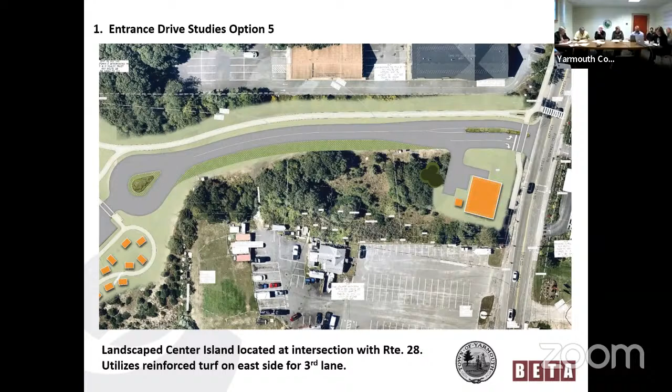So that gives them flexibility without an excessive amount of pavement. We really just kind of open it up at the entrance with the island and the left and right turn lanes. And so then what we did is we shared this with CDM Smith, and those folks are the ones that are working on the pump station itself. So this was their concept sketch they came back with. They're kind of zoomed in right at the intersection of 28. And I don't know, Kathy, you want to give them a little overview of what CDM was tasked with?

Was saying, okay, we want to have our entrance this way with a 6-foot island in the center - are you going to be able to fit in your pump station in the area that you have left, including having the setbacks from the isolated wetland of 35-foot no disturbance, and a 50-foot. You can see in the green there's a 35-foot and the 50-foot, so they didn't quite meet all of that.

But what they're showing here is a lot of grade change. They not only need to get above the base flood elevation, but because they're a critical facility, they need to be 3 feet above. So they need to be at a first floor elevation, I believe, of 14, when somewhere around in that area might be 8 in this particular location. So that's why you're seeing a lot of grading going on here.

They also have a lot of stormwater management that's being proposed here. What we have for most of our stormwater management is actually the porous pavement, so we don't need to have a lot of structured or surface stormwater. So that's something that we need to take a look at, because we really want the entrance to look a lot nicer than having a stormwater basin and a lot of grading in the front.

So there's a lot of work that still needs to be done here. They have a retaining wall - obviously we can soften some of that with some vegetation, but they also have their generator on top of that.

So we want to start taking a look at maybe if we can move some of these things around, maybe move it a little bit closer to Route 28. We really want this to be a much nicer entrance to our park and not just something where somebody drives by or rides by on the bike path going, what is that thing over there? So we got a lot of work to do, but this was just giving them a general idea.

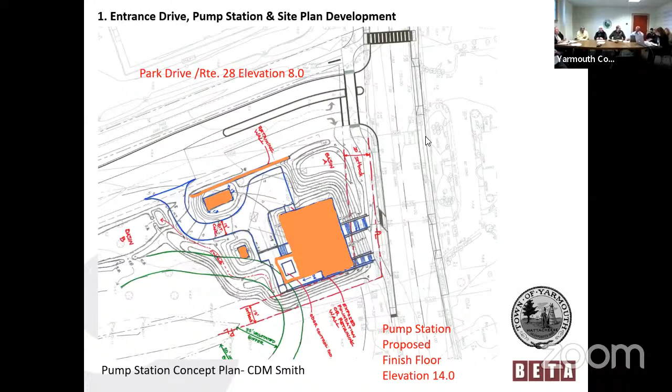A center aisle between the restrooms then, which is where the plumbing all comes in and is connected, because this is not going to be a four-season facility, so they need to be able to drain everything down at the end of the season. And then right now we're still carrying the office space, kind of a flex space in the front on the southern end of the building. So it could be, someone said, maybe some storage in there possibly, and certainly a flexible use in that space, and that's about 10 feet wide.

So the southern end being the end that would be facing Seagull Beach. Correct, the event space facing into the People's Park. We can go into some of the plan views of that as well. And we had mentioned early on about this office space possibly being shared by any of the groups or performers that might be performing.

That's still not defined. I think that was when we had the discussion about having the restroom facilities closer to the potential staging area. But now it's more like the idea of being able to use it for ticketing and for administrative purposes for the event space. It's really a flex space. It sounded like there was a lot of different things that this space might be able to be used for.

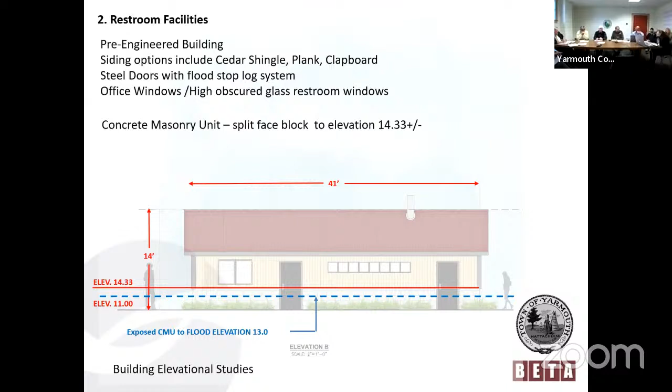This one, we show it as if the block is visible on the bottom. The example we were looking at is like the DPW facility, which has the architectural block on the bottom. You have that option to highlight the bottom if you wanted to and have that kind of block visible - it does make the building a little longer and narrower. Then the top option, we just showed the siding coming all the way down to the ground. Behind that would be the concrete or block to protect from flooding.

So if I can quickly ask, are you suggesting this is the style of what you want? We're moving in that direction. We can talk about that in a little more detail in terms of finishes and materials. Is that what you're asking when you say style?

The look of the building? Yeah, so generally this is like a barracks. I don't like the look of it at all. I'm being very honest - I think it's ugly. We haven't developed a lot of the architectural treatments, so we can work through that with you and refine it somewhat.

So what you're seeing is kind of a function of the floor plan decision - the way the spaces lay out inside, and we translate that into a footprint, then build up the elevation views. So I guess one of the first questions would be, do you like the idea of the exposed block on the bottom or the siding going all the way down?

I like the second one on the right at the top - the siding coming all the way down. Yep, agree. I don't think it makes a difference one way or the other unless this is what we're going to commit to as the style of this building. Well, I think we're going to change the style of the building or the look of the building.

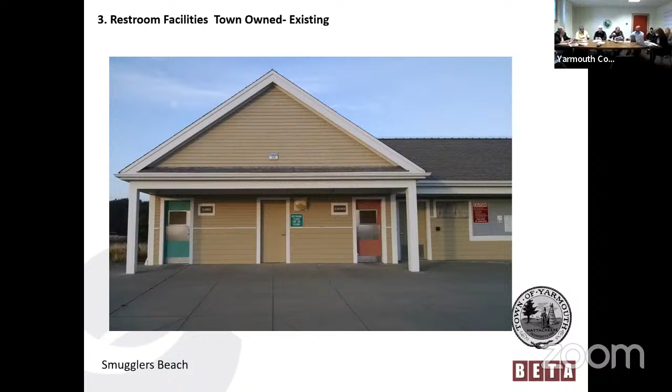And so, thinking about the finishes, I think we talked about not seeing the block and running the siding down. Smugglers is a wide horizontal style. Hardie plank is something you would use. Is that a look you like, or would you prefer a Packet shingle, which is a little more traditional, truly shingle?

Wood shingle. Well, I'll tell you the Hardie board is going to give you a much longer life expectancy. This is a clapboard look, but you can get Hardie plank and even shingles too. So it's a preference of whether you're interested in clapboard or shingles. We can get the material. I think you've got to see the design of the building to decide.

There was a reason Packet is wood shingle, right? It's a very traditional approach, because it's in the historic district, but I don't know if that's necessary here. So here I think we could use a Hardie plank type of material, same look as DPW. DPW preferred an asphalt shingle roof over a metal roof. Fifty years, we'll be dead and gone before they redo it.

Do we want to get back to the solar question? Because I think that matters. You wanted me to find a plan, do you have it? So what would this solar provide? What utilities are we having in there, just lights? We're going to have power to the building already. Fans.

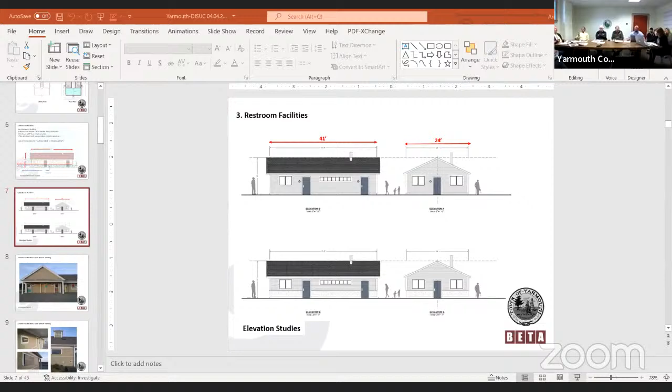Well, it's way back. And it would be on the southern side, which means it wouldn't be seen from 28, it would be seen by the boardwalk. So positionally there's no trees to get in the way. It would probably generate decent power.

Stand in the picture. Yeah, everybody turn around. Well, it's only Carl, I guess. It's just you, Carl, and the public. So I'll put this, sorry.

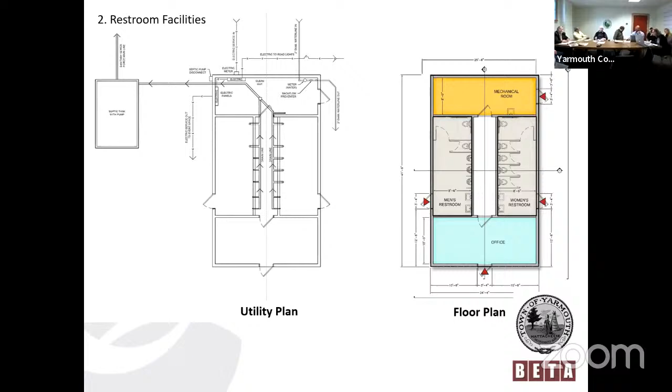Susan, do you have any opinion? In a big event, though, having the two on one wall gets congested a little. Okay, maybe for a large event it might be better to bring them up and then separate them. I like the idea of the common walkway, getting them up onto the platform and around the building. Right. Men to the right, women to the left. It's like traffic calming. Non-binary. Yeah, right. To not bring it all to the same spot with a big crowd. Okay, that makes sense. But we won't go there.

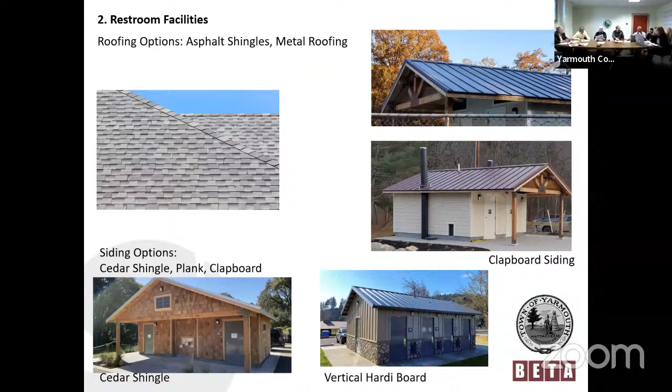So we're almost talking about the Packet Landing model as what we're looking for. So we're basically talking about a post and beam structure, with a concrete CMU or poured-in-place knee wall set inside, enough to have a walk around the building, and with some kind of shingle, a cement, CertainTeed type, on the treatment. I thought you were talking about having a wrap detail on something that comes out and has the overhang at the entrance into the bathroom. So basically an overhang around the structure with post and beams with lighting, and it seemed like there was interest in the cupola concept.

Yes. Take the existing building that you have that's very nondescript and set it right inside that, and see where we can go thematically. It's going to be a $1 million building. Well, it doesn't have to be post and beam and all that. We get stimulus money. Kathy makes a good point. I think the budgeting for this was pretty modest originally. But until you commit to something on paper and say, yes, this is what we want, then we can go through the process of estimating. It'll be somewhere in between. It will be more embellished than this, but not quite as fancy as Packet Landing. Break the bank. Packet Landing was what, $400,000, and it has two restrooms and a deck.

Yeah, I think what we're all saying is, nothing more than this, as long as you understand it's not going to be available. Not as expensive, right. Get us close. Sorry, I didn't mean to turn your back. Okay, I think you got the general idea about that. All right, Eric, what else you got?

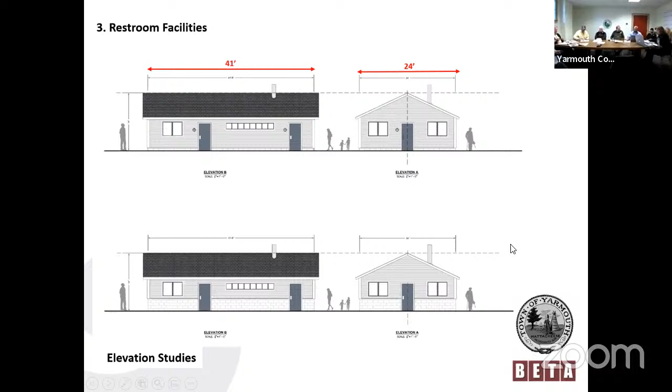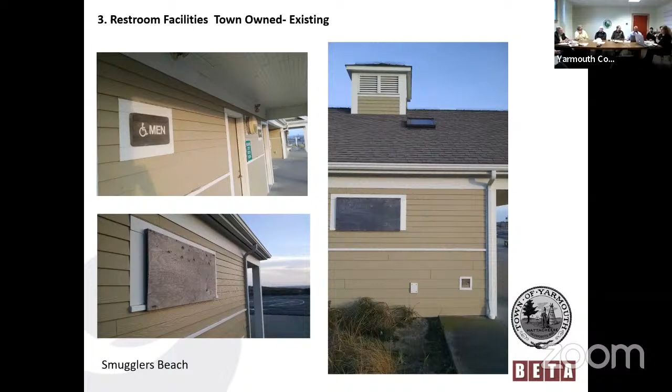We'll keep working. We went through some of the finishes on the outside and we'll come back to you with that. I think you said shingle would be okay or clapboard, either. Think like Cape Cod, shingles, if you get it with sand dunes. Cement shingle.

Cupola, did you talk cupola? Yes, kinda cool. If it was illuminated, that'd be great. Illuminated, that's been waiting to get put up for a couple months. I can probably get it.

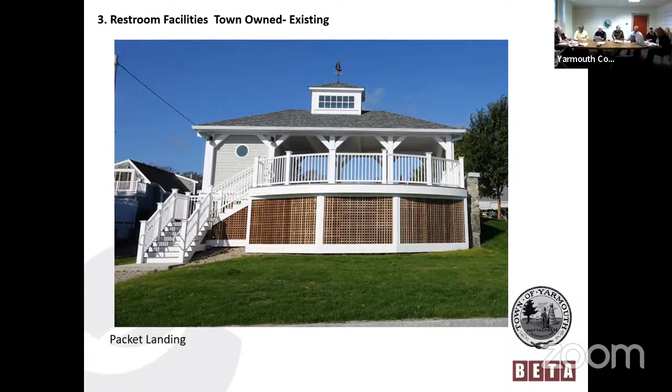But the thing is, you could do prefab beam, can it be small, a shop can make it, and plus you can use panelized construction. There are some efficiencies we can develop along. It doesn't have to be stick built on site. Just put it on at the end.

No, got some ideas on that. All right, thanks, Dad. I'll need to go to Hawaii and investigate cupolas in Hawaii. Well, next destination, actually, why trip.

Why don't we get the Votech school out here to build it for us? Maybe there's pieces that they could help with. Hey Jim, how about we get the Votech school to come out here and build it? They do projects like this. It's a great public project.

You match some funding to that, we fund all the materials and everything, but they build it, so you get free labor. I mean, it's not free labor, they're not free. Well, it takes longer, but you can't do that, it's like illegal because they...

Well, it is prevailing wage, it is a town project as well, state wage rates, and so there's a process. One of my notes to myself with regards to naming, having a discussion we'll get to, is public-private partnerships on some of this stuff.

Yeah, that's a good idea. An initiative like that on this building, maybe you could build some really great partnerships to get the building to happen. Sort of like the Yarmouth Police Foundation, and the same thing they did with the LaRusso building at Flax Pond. So we have some stuff. Anyway, I don't want to get into that.

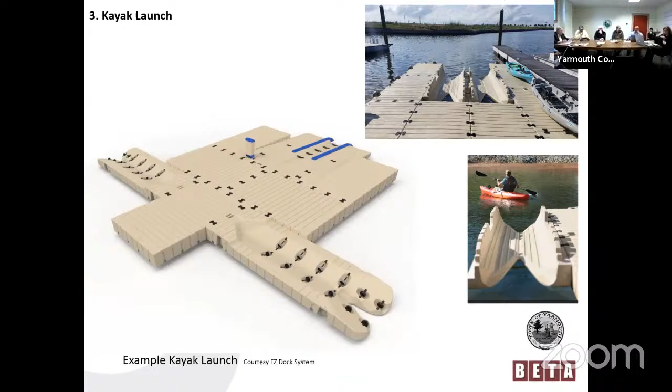We've been looking at some other options that have almost wings or fingers that stick out, allowing a slip where the paddleboard or kayak can fit into that. We reviewed that in more detail with Carl this week, and the feeling was something more flexible like this, with provisions in specific areas for launching, but also the flexibility of a more open space in the middle, would work better for different types of canoes, kayaks, and paddleboards to use it.

I think the consideration we're looking at is, if we had a scenario like this, providing grab rails so it would help you get down into the water, or likewise be able to pull yourself up. We're looking at universal access in terms of disabled folks, how they might be able to use the facility. Maybe there's a transfer platform or a little bench mounted to the float so you can go from whatever your position is to sitting on the bench, then into the kayak itself.

These examples, I think, are what we feel would work best, based on the work out there. As for the sounding work, I can show you this. So we went out—the weather and availability combined—we had a hard time doing this in February, but we got to it in March. We were able to go through the soundings.

You can see it's kind of a bowl shape. There's not a real clear channel through this area—it's quite open—but there is this targeted zone where the water is a little bit deeper. That's where we're headed to try to put the floats in the water.

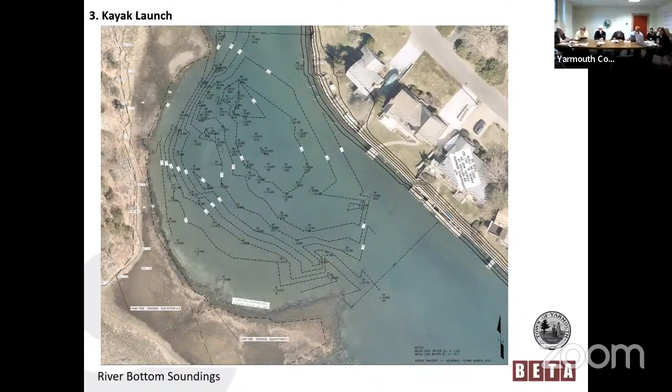Is the idea behind having floats there, as opposed to just natural ground, to keep people from disturbing the area by walking in it? Yeah, it's salt marsh. Unfortunately, you'd have to cross the salt marsh today, and dragging—you can see in this view—that emergent grass, it's probably been done historically, but if you really bring people to this park and focus activity there, I don't think that's going to work for the vegetation to survive long term. So the goal is to get them over and then onto this.

So onto this, you'd have a float like the next panel? With the ramp area itself, you'd have a ramp to go down onto that, correct, like a swim-on type of thing.

We're working on design concepts that don't rely on pilings. We're working on anchors that could be in the floor of the river with a flex mooring line, so the idea is you wouldn't have as much visual stuff—components around it—and the mooring lines would be set up to allow the floats to go up and down with tides and so on. So it's that kind of look, but it would have the wedge-shaped platform at the bottom.

Would it be a piling or something for the ramp? Yes. Because I'm just trying to think—so it's easy for Carl to put it in and take it out, it's not a major undertaking. Right, we've been talking with them about how to do that best.

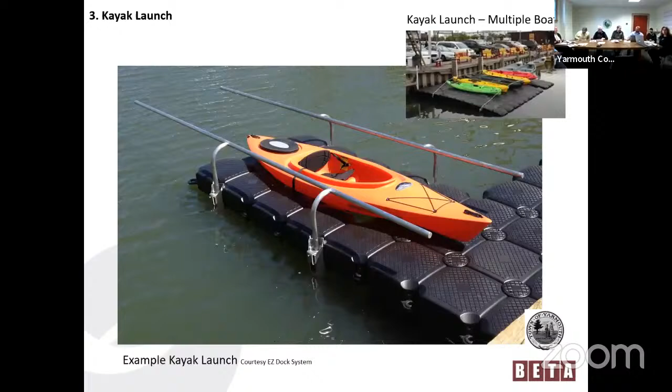The channel mark—operationally, are we thinking of a concessionaire to do the kayak rentals and things? Possibly. We're trying to have like a little kiosk, so to speak, where someone could rent out different kayaks. Obviously we'd have to go through a whole process for that, but we would also have the racks there.

You see it around a lot of different recreational areas where they rent out racks for vessels, kayaks, that'd be helpful to people—maybe an extra shanty building for the kayak rentals, like the ones that take place just across the river in Dennis, at the Veterans Park or whatever. It's a possibility, obviously it depends on how interested someone would be in having it, and how frequent, and how much money they could make.

You put out the bid, but we'd also say the public could just ride up with their own kayak and ride right under—bring your own kayak, yeah, I think that's what they do over at the Bass River Bridge. If you pull up with your own kayak, you can rent, and they have theirs to rent as well.

So it's the equivalent of a town landing as well as a rental. Actually, Carl will know—would we want a rack, and is there, do we do that now? We have a rack and you pay a fee for that, right? Yeah, if you go to Bass Hole, before you get to the park, just as you get to the parking lot, there's a dirt area—there's a rack on the right-hand side.

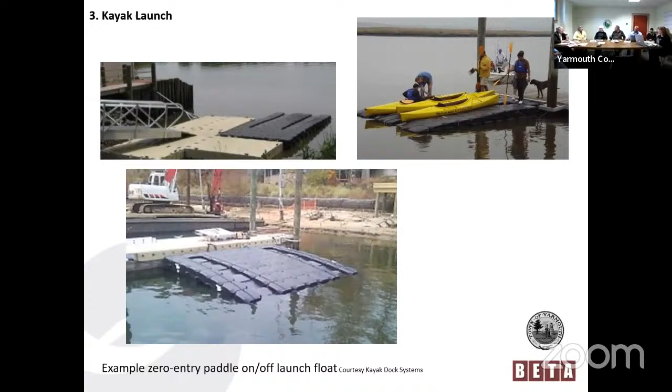People pay a fee to keep their kayaks there, just like at a lot of mooring places, or Dennis Pond, a boat slip—not as much, but they do charge a fee. Kind of like a bike rack for your kayak. Yeah, it is. There's not a 10-year waiting period, is there? It's only... that's a tremendous, okay I like that.

So Carl has something to add. Well, since you guys were picking on me most of the meeting, I finally worked up enough anger to speak.

There's a tremendous, absolute need and desire for rack storage, especially for paddle-style boats. We sell out all of our racks pretty much in an 8-hour period. This year, I think we sold out Bass Hole in the first 3 hours, and that was simply people waiting in line to rent those racks. So they're very popular. A facility with close proximity parking and a relatively calm area to kayak in, I think there'd be quite a demand.

Carl, this is Jim. Couple quick questions for you. Looking at this chart with the soundings, can you give us a general idea of where the actual channel for boating is? Is it right where that arrow is now, or are we in the channel right there? How far out does it go?

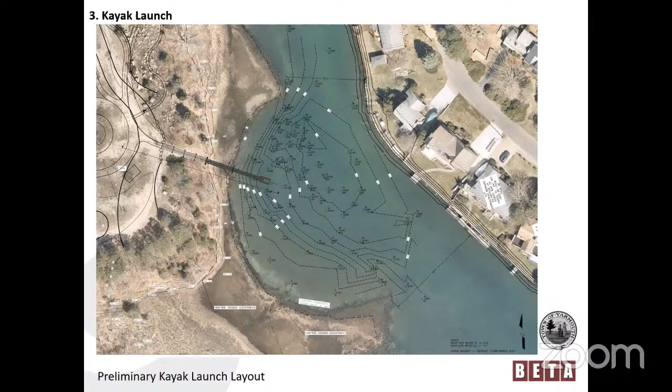Wonderful. Thank you for your assistance in helping us get this done. We appreciate it, your input is valuable. Absolutely, yeah, you just need to get it done before the end of May, all right? I've been saying get it done for a long time. What, May, right?

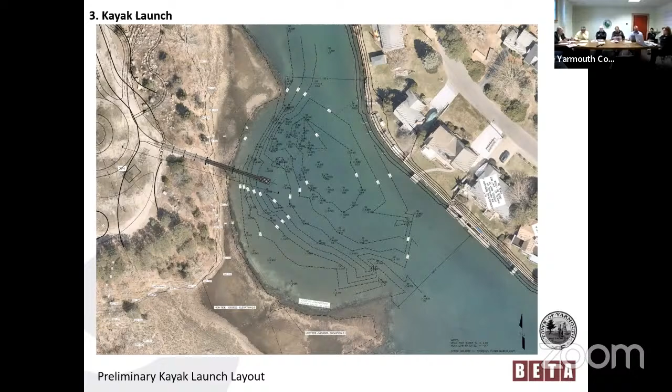The way this design's set up, we have a section of boardwalk approach that brings you up to an elevation. I'll show you the cross section. We're proposing a fixed gangway to span over the salt marsh, and then an incline gangway that moves with the tide as the last span down to the float itself. At the concept level, it kind of looks like this.

On the on-land side, coming off the cul-de-sac, it slopes up, and there'd be a section that would be flat. The real reason to get up to this height is to maintain the clearance over the marsh as we come down.

We're working on how this transition works, but there'd be a sloping gangway that would be fixed but removable should DNR decide they need to remove it. Then there'd be the hinged piece and the floating gangway, which would come all the way down to the float itself on the bottom, and that would come off in the winter months.

The system we're looking at is the helical anchor. It would be anchored into the floor, not a mooring block like half this table, but screwed in. Carl wanted something with a light footprint, and it makes sense here. We think the system would work. It'd be screwed in, and there'd be a buoy to locate it in the spring.

Probably the float would be removed, but he says there's not historically big icing problems, so they may elect to just leave the float in. But you could remove the float entirely and the gangway sections as well.

Cool, anybody else have any? Is 4 foot wide enough to carry your kayak down? You got the drawing still?

We're working on it. Carl had some thoughts about that, and the concept he's saying we need to look at in more detail is a way to put the kayak on the rail and let it run down the edge of the rail, so you can walk it down, if you will. We did a couple concept sketches, so part of the gangway design would be something to accommodate the kayak.

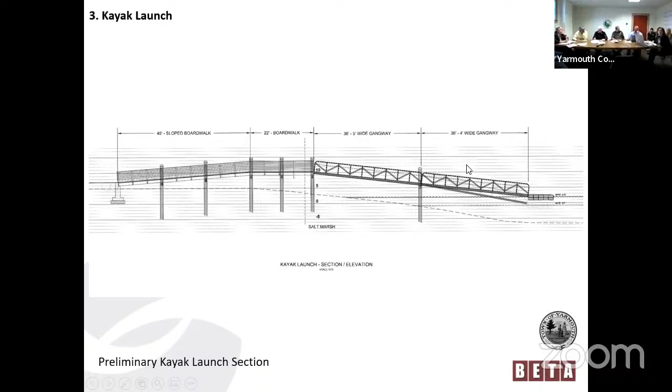Let's talk about the boardwalk loop. A lot of the stuff I included is just background you've seen before—the loop itself, the overlook locations, and the overall approach to the height of the boardwalk. What I wanted to talk about today was some of the research we've been doing on composites and the support system, so we can work through those decision points.

So this is the loop configuration. Can you go back for one thing? I am still concerned about the location at the top of the page. Let me put my cursor on this third overlook. Is that right?

Yes, and I'm still concerned going from here to here. I understand why the height of the boardwalk is going to be coming up, to provide additional clearance, and because of that the profile is jumping there. At the red, right? So the red is higher. Right, we pulled this back.

Susan was part of that too, and we were looking really closely at the surrounding properties and trying to make sure we weren't too close. So this is the pulled back route—we pulled this alignment back in the fall, and this is the lower elevation in yellow, which then transitions up to higher in red.

So I still see concern with that location because of the houses over there, whereas we're shielded for the... I thought we made this discussion and decided that this is what we're going to stick with, the best one.

I don't know if we totally settled on it. We're looking at it because I want to. Well, you haven't settled on it. I haven't—I think the rest of the committee may have.

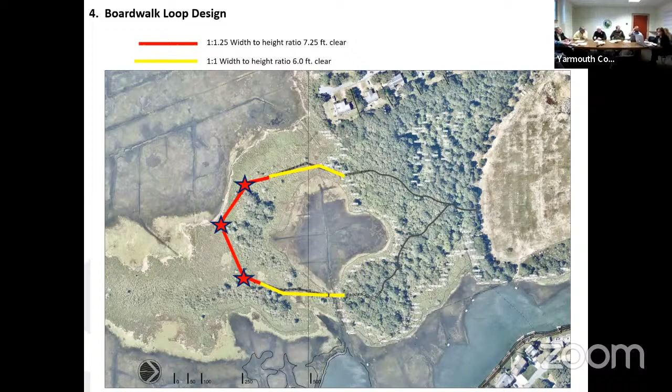We also recently did some vegetation analysis regarding the height of the vegetation under the boardwalk. In some areas it's marsh, so it's low, under a foot. But a lot of it is high tide bush at the upper range, some of that 3, 4, even 5 feet of vegetation below. So it's not just a dead flat marsh with an elevated boardwalk. You have transitional areas where it's more obscured because of the vegetation it's passing through.

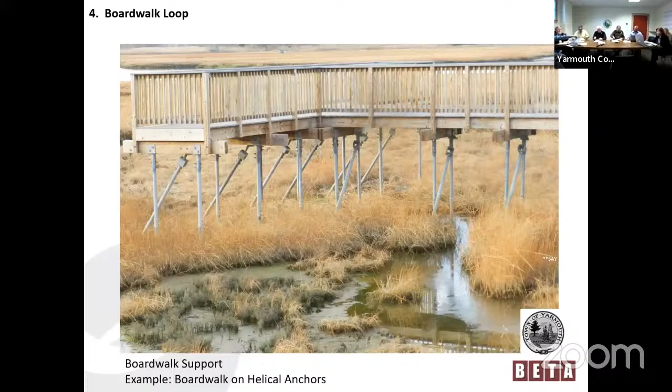So just to kind of flip through again, going through the different approaches that we talked about, the different heights, the different elevation of the marsh, the helicals, and then we've been spending a little more time thinking about composites, which is a conversation I had with Kelly and the Conservation Commission. And one of the interesting things about composite pile is that we could possibly do them as a monopile. So this is one of the things that we wanted to look at as a single pile. We showed you this before.

One of the biggest benefits might be if we could change the beam to a different type of beam, we might be able to move the piles further apart. So further apart, less impacts in the marsh, less piles. But what we started to find, the more we looked at that, it's definitely going to make the beam taller. So it's going to raise the height of the boardwalk because we need to keep the clearance below. And it's also going to get really expensive to get these increased spans, trying to increase the span length to 20+ feet. So while it was possible practically, there were some other downsides in terms of the boardwalk getting thicker visually, and exponentially more costly.

Not to interrupt you, but let me ask a quick question. If we go back to screen 4, Boardwalk Loop with the boat in it. When we're measuring from the marsh up, where does the measurement stop to get the height? At the top of the planks or under? At the bottom of the beam. So the support beam, it measures to that spot. Right, that's what we're measuring our clearance down. So it's from that beam down that you'd have to get the 6 feet. Yeah, and generally there's enough elevation change in the marsh that we're able to do that pretty easily. So the pier cap is not considered? We're not including that in the assessment. We're looking at the bottom of the structure itself, the span. Sorry, I didn't mean to. No, it's a good question.

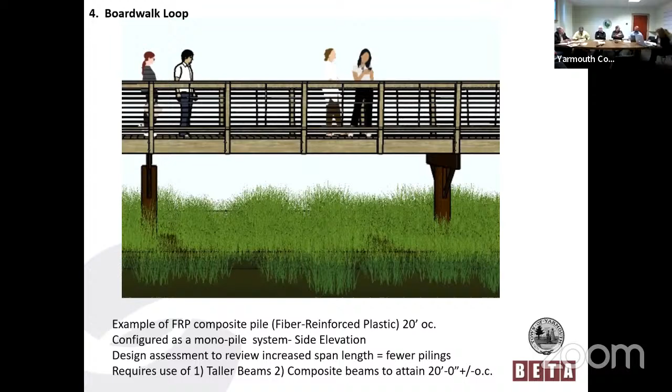Right, in terms of the cross bracing too. You'd definitely tie them together like we're showing here. Because every once in a while, if you do have icing and a king tide, then with the cross bracing, forget it, you just junk the whole thing. Right, you could have stresses on that. So maybe you're saying we're looking at the long-term monopile. Maintenance, you don't want to be fixing it.

Not a big bugaboo. Not have to worry about ice. Global warming's gonna fix that. So we only have to make sure we're high enough that when the flooding comes, it doesn't wipe out the...

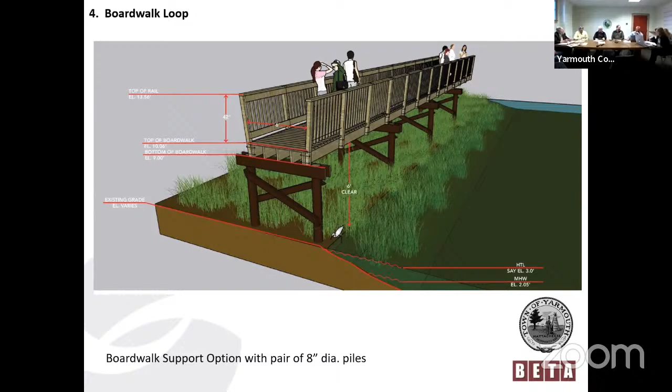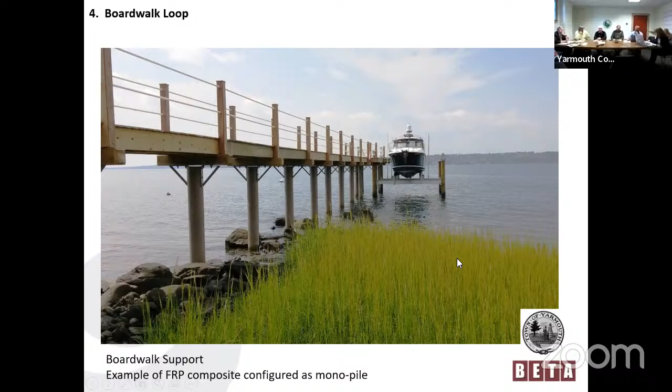Okay, what else you got, Eric? So just to kind of close out where we are, I just want to make sure you're okay with this, because it's a little bit different than where things started.

The direction when we came into this phase of the project was to pursue the helicals. The idea was the equipment would be up on the helical as we built it on the decking. What we found out is that basically in any of these scenarios, the equipment's going to be in the mat, just because of the size of the anchors and the height above the marsh for the system.

And so once we said all the equipment will have a temporary impact on marsh mats, it sort of equalized the assessment. So now we can look at maybe a driven pile to some degree, and what the footprint is of that. There are different techniques to get those in, but if we can keep those piles small enough, it can keep the equipment smaller. The composite piles are lighter than a wood pile, so there's not as much weight on the marsh, and not as much equipment required to move them around.

One company we're working with said a couple of laborers could actually move the piles instead of a separate crane to rig it and transition the piles around the site itself. So as long as there's buy-in and support, we're going to continue looking at the composites, looking at the single, and looking at the paired option. That may be where we land for 30%. We've got these two options; they both have different footprints, but there's benefits in terms of longevity for the composite, and there's redundancy if you end up having to.

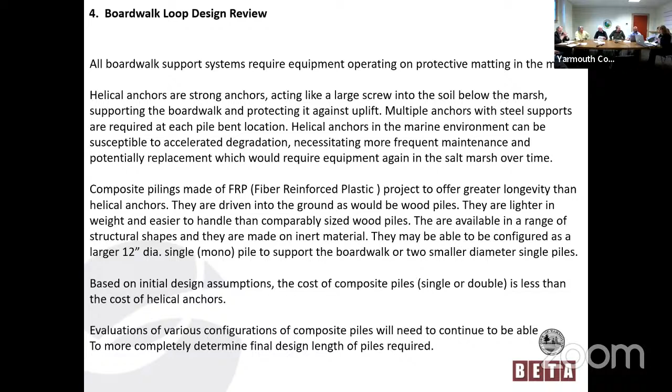So that's what we've been doing with composites, right? This is kind of where we are. The goal was the 20-foot span, but we really can't do that, so we're back to 15. We're at 15 spans with composites.

And then the last thing, Kathy wants me to remind everyone about schedule. We're kind of pushing now into April for sure, and we were behind where we wanted to be for the 30% package. But my goal remains to finish that this month, and I talked to Kathy a little bit about it, there might be some holes in that package.

One of the holes we didn't talk about today is the bridge. That was something you tasked me with a while back, to look at the bridge and come up with some concepts. It's one of those things because we wanted to solve the kayak launch and some other things, we're dealing with some traffic issues as well. So we'll have a 30% package and there'll be certain areas where we'll say, okay, we've got to spend a little more time on the bridge design.

We might dedicate half a session to bridge options and how that's going to work. But I'd like to get most of the plan stuff together and get it committed to paper, finish that package.

You have a briefing in May, right? The Board of Selectmen have requested an update on where we stand on the Riverwalk Park. I think we had talked about May 3rd, but I know Jim can't be there, he won't be back till the 9th. So we may want to look at rescheduling that to when Jim can be there.

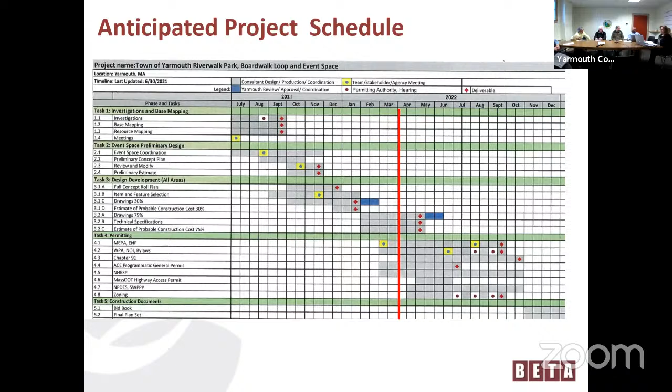So just as a curiosity, how does this affect us? With you leaving conservation, who picks up the job, the hearings, et cetera, where you're leaving off? So there will be a replacement for me at some point, hopefully in the near future. I'm sure whoever they bring in will be able to step right in. They have posted the position and there's actually been interviews. Oh okay, so there is some progress. Yeah, and I think it's good that we've had some conversations with the commission, so I feel like we're all on the same page as to where we're at now.

So we can refuse to let you leave if things get bad? Just want to know. Trust me, we've begged. Are there points though in the decision-making process, Jim, that the commission will have to check off something in her absence? The next thing is the actual notice of intent, which is a little bit way down the line, and I certainly hope that we would have someone on board by then, and that the person won't take six months to get up to speed.

And we've had a couple of briefings with the Conservation Commission and meetings with the agencies, just kind of background, so they'll have a learning curve. It'll be very hard to fill Kelly's shoes, but we think we have a plan, and there's enough documented progress and intention as to how to proceed.

We're gonna get to the point where they need to say something and there's no one there to say it. Right, yeah, that's why I was asking. There'll be someone here by that time, but we know she hasn't left the Cape, so if you're not leaving the Cape, then we'll just make sure we have your address, Jim, when we need you. Be parked in the parking lot.